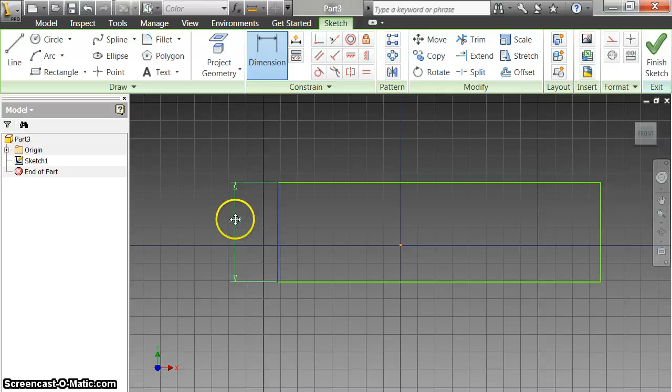So I do a new standard IPT, open up a new standard IPT. I'm going to start by drawing a 2-point rectangle, and I'm just going to come up here because I'm going to have to dimension it. So I click on my dimension. I'm going to do the left side of it, which is 2 squares high.

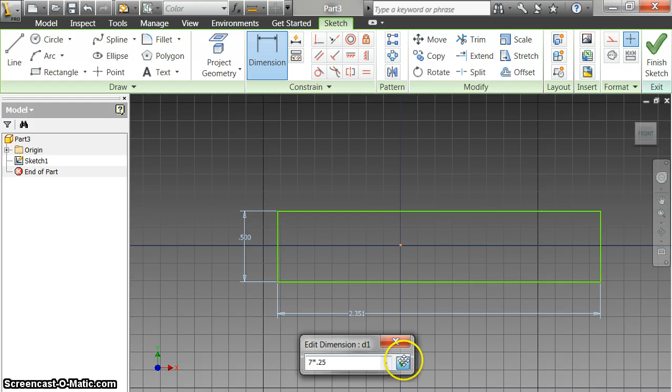So each square is 0.25, so I'm going to make it 0.5, half an inch on this side. And then this one is 2, 4, 6, 7 squares, so that is 7 times 0.25, which is 1.75, or you can do 7 times 0.25, like that. And when I click the check mark, it'll tell me it's 1.75.

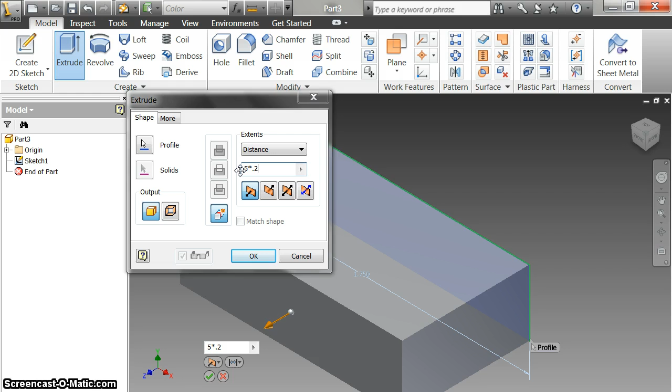I finished my sketch, and now I'm going to extrude it. I'm going to extrude it 1, 2, 3, 4, 5 squares. Again, you can do 5 times 0.25, or you could do 1.25, which is what it would end up being. So this is my base.

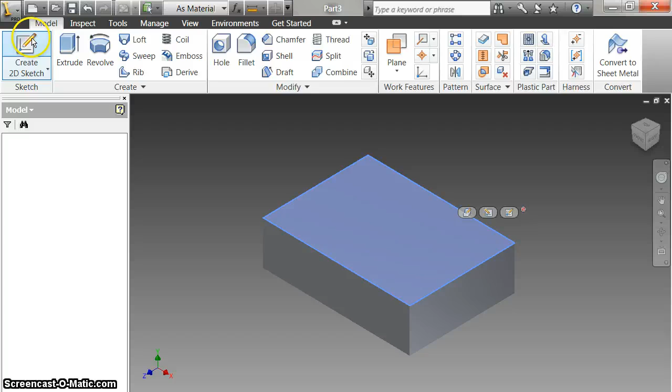This thing right here is, if I go back to my drawing, it's this section, just this bottom section right here. So I come back to Inventor, and now I'm going to create sketch, and just click this top part, and click on the top. So I've got that. I click on the top button, so I'm looking straight at it.

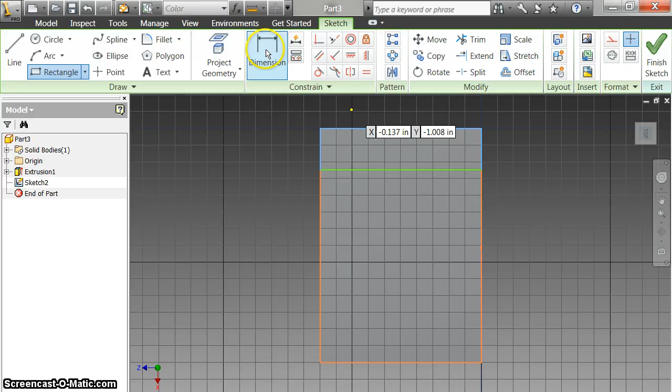I'm going to extrude this top part first. So I'm going to click rectangle. I'm going to go till I see the green dot, click, and come over here somewhere till I snap to that side and click that. Now I dimension the side of it. Best way to know I got it is click this line,

come over here. It is 2 squares, which means that is 0.5. So I'm just going to put in 0.5. I don't need to do 2 times 0.25. So that, I finished my sketch. And so that's what I've got there.

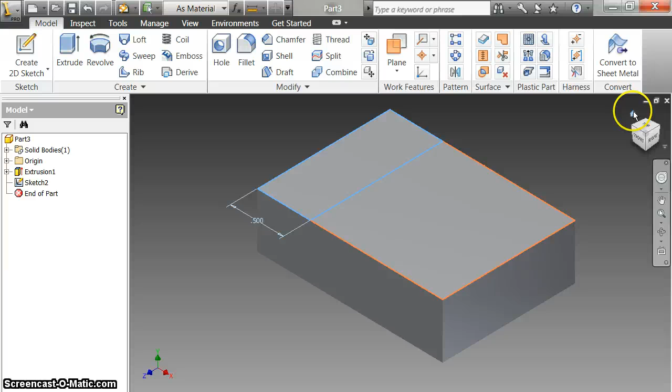So now I'm going to extrude. I click on the top of this, and I'm going to extrude it 1, 2, 3 squares, which I know 3 times 0.25 is 0.75. And there you can see, now you can get an idea that that's what it is.

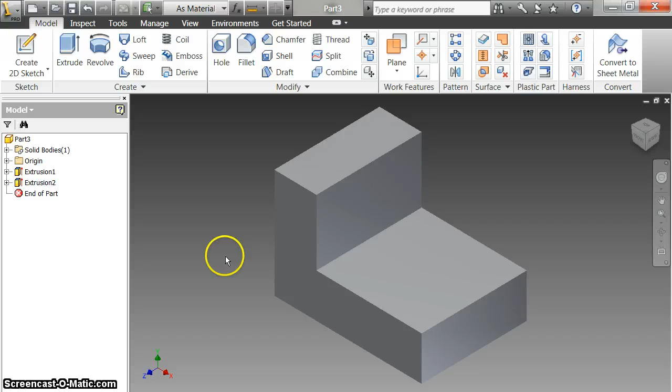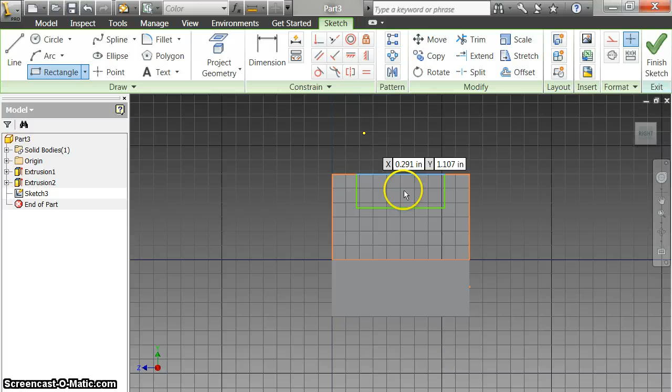So now we just have to cut out this part here and this part here. You can only do them one at a time. So I click on sketch, click on the front of this, click over here so I'm looking straight at it, and now I need to click here somewhere and go over here somewhere. And then I just need to dimension it. I'm going to need several dimensions here.

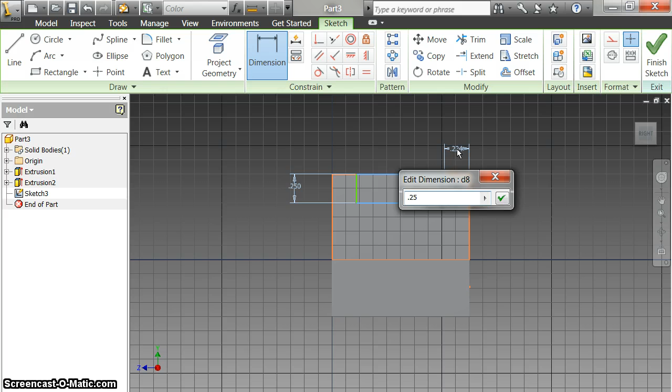I need this one, which is 1 square, so 0.25. I need from here to here is 1 square, 0.25. And then I need this one, is also going to be 0.25. Okay, so now that's all the dimensions I need.

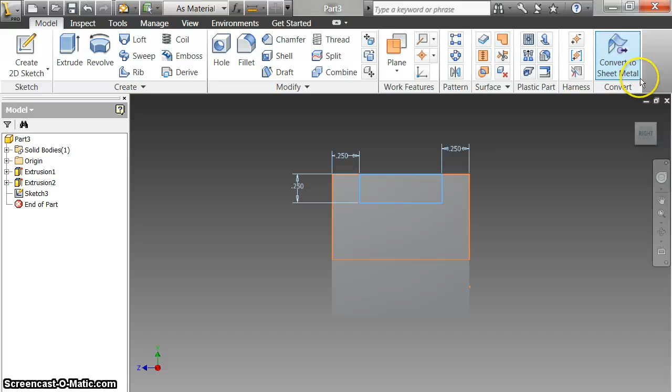I don't need to dimension the width of this, because if this one and this one are dimensioned, this must be. Finish my sketch, turn it so I can see it better. Click extrude, I click this, but now I don't want to extrude, I want to cut. So I click this button here. You can see that it goes in the opposite direction, goes all the way through. I could put a number here, but I don't need to. And I click OK. Now you can see it's really getting close.

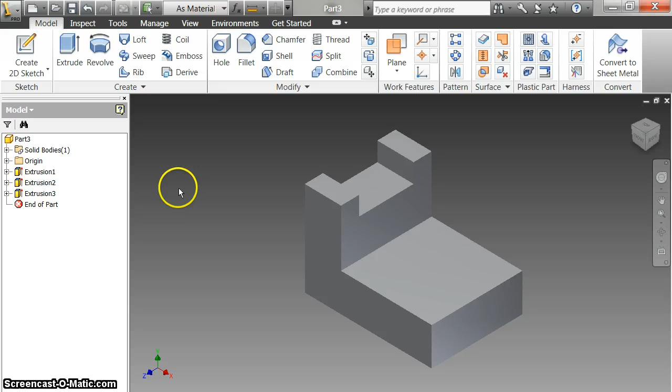One more. Create sketch. Click on the top of this. Rotate so I'm looking straight at it. Again, a rectangle. Click here. Come over here, I don't want to snap that. I'm going to click somewhere like this.

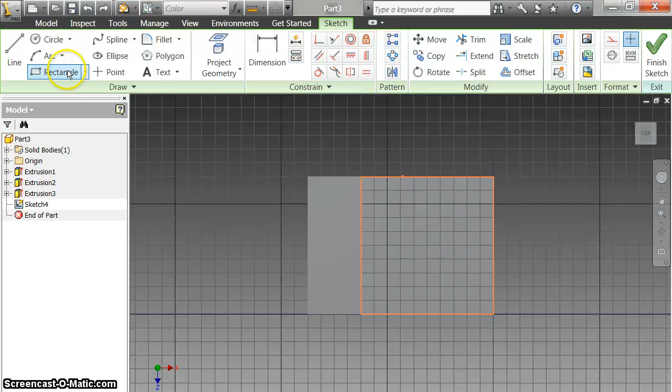And this is where, let me back up and show you this. You can see this little dot here, which is the middle. If I click to that, if I make my rectangle so that it snaps to that like that, I can't change this dimension. If I try to dimension from here to here, and I want to make it 0.5, oh, it does work.

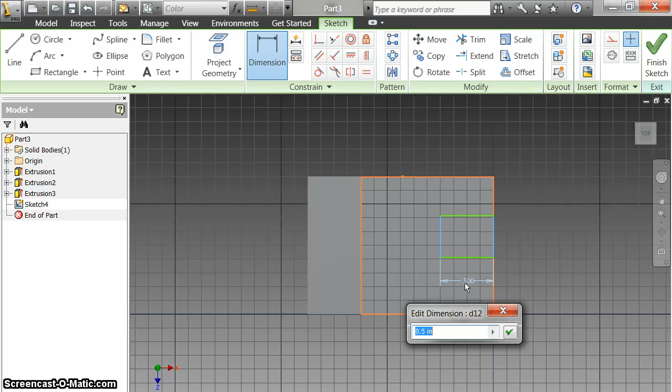Okay, good. Well, let's just change that, because that's going to be 1, 2, 3 squares, 0.75. There's a number of ways I could dimension this rest of it. I'm going to dimension the width of it. Click this line, and it is 1 square, so I'm going to make that 0.25.

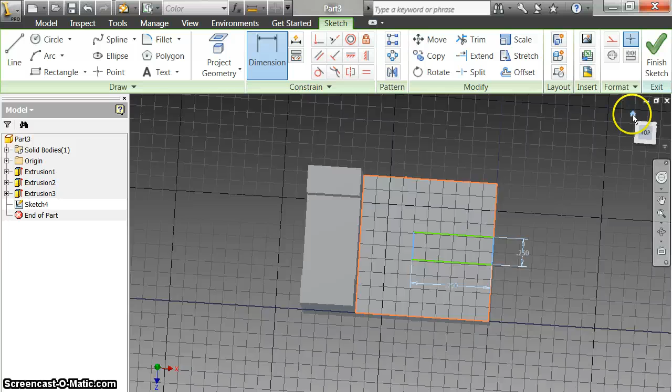Sometimes people would stop here, and if you stop here, I don't know if you can tell, but this is not centered. Watch what happens when I add this one last dimension from here to here and make that 0.5. You'll see that it moves a little bit.

And I could put a dimension here, but it's already going to tell me - I already know it's going to work. In fact, it will come up with a window that says this would over-constrain it. So yeah, it's thinking right now. It's going to tell me, no, I don't need that constraint. So I just cancel it, finish my sketch,

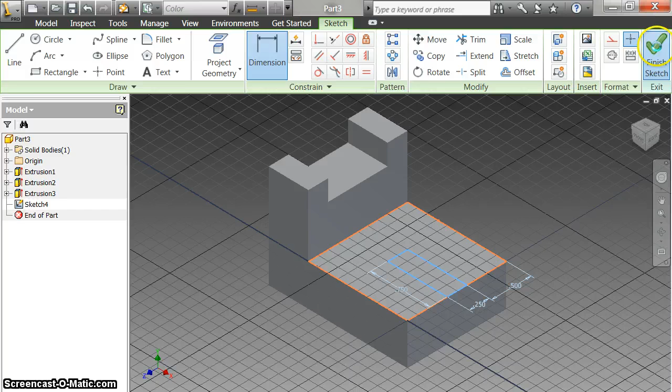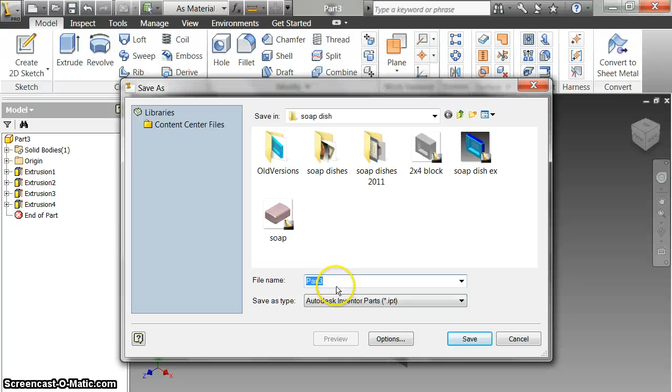Now, since I've got time, I'm going to save this as ISO 1, just to save it there. And I'm going to go through making a dimension orthographic, because I want you to do that too.

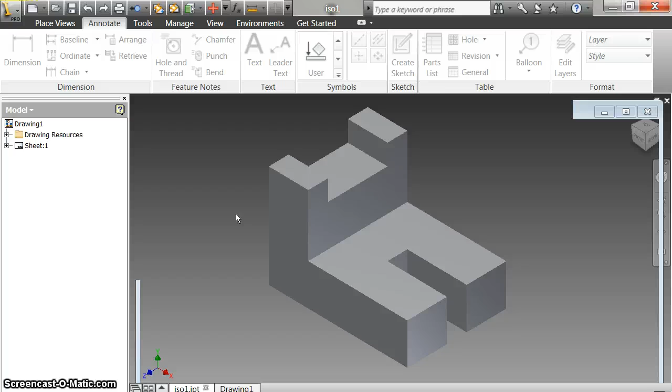So now I come up here to New, and I'm going to do a standard IDW. Double click on that, my window will come up. Looks like that. So now I click on Base. I click on this folder right here, this button. I want my ISO 1.

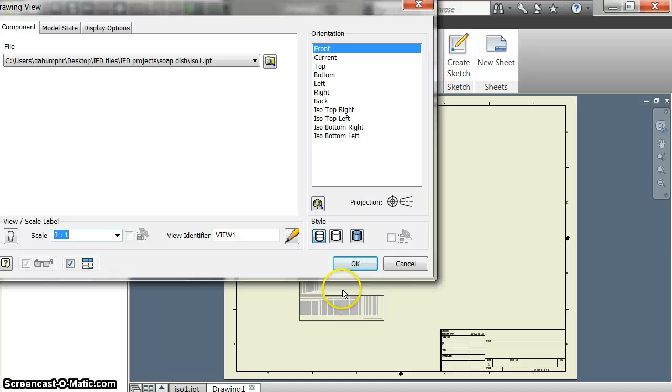Okay, now let's see. Oh, that's really small. So let's change the scale here. I think 3:1 might work for this one. So we'll go 3:1. I bring it right here and I click, and wait for it to work. It'll work its magic.

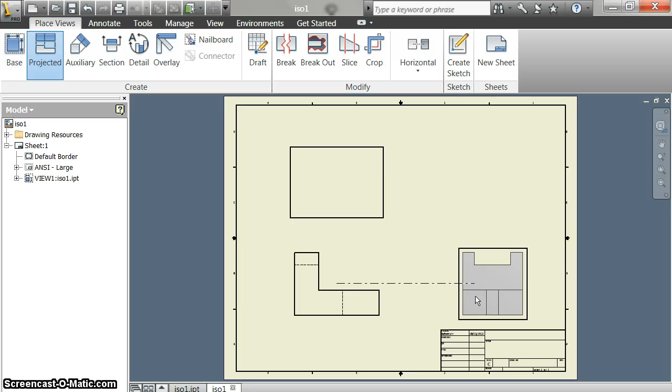Then I come straight up and I click here. That's my top view. I come over here, I click here, that's my right side view. Come up here and I click again. Then I right click, create. Perfect size. So do the 3:1 when you do yours.

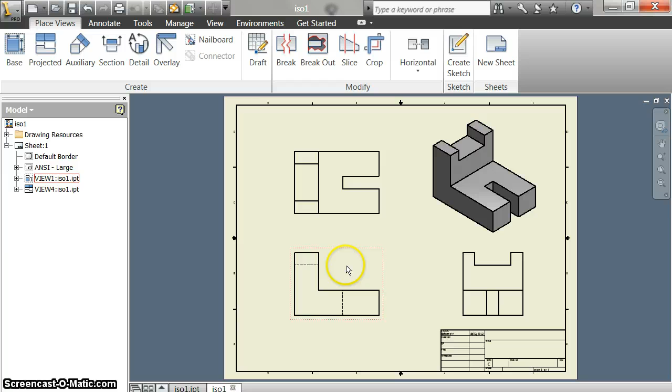I right click inside of this, edit view, check the blue cylinder there to color it in, and then I want to add my dimensions. Let me show you where you should have some dimensions here.

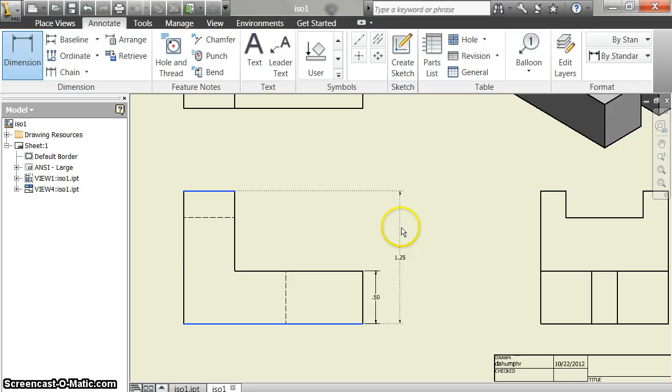I want to have this dimension right here. I'm going to zoom in on that. You'll notice that it goes from dotted to solid. I'm going to do a dotted line here. I need a dimension from here to here. Like that, that gives me that.

I'm going to come up here, and now I need to have a number of dimensions. I'm going to go from here to here. And I'm going to do this - it's what's called chaining dimensions, where they all come off the same line like this, and it looks really nice in drafting.

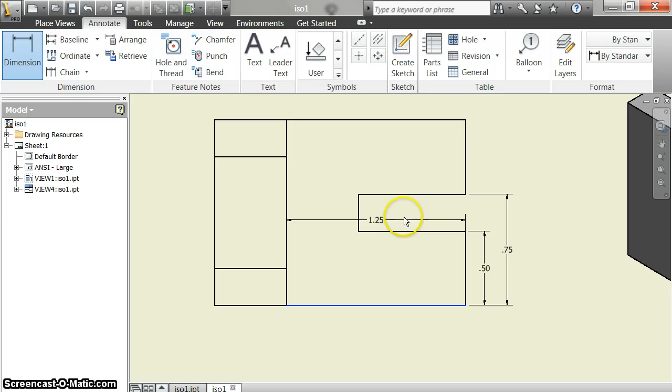A lot of times you'll see this, and we're going to try to do more of that. And so I'm going to do from here to here, and from here to here.

Oops, I'm going to put that out there because I also need from here. I could have done, and you could have done these a couple different ways, but I'm going to leave it like that. Let's see what that looks like.

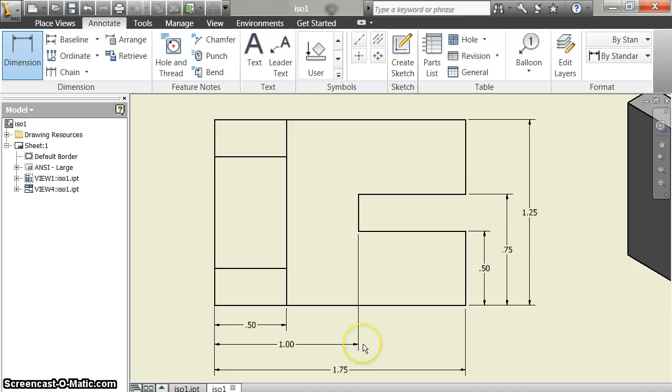Okay, and then I'm going to come over here, I'm going to do some dimensions here. I don't like to dimension off of these hidden lines, I like to dimension off of regular lines. So I'm going to dimension this one right here. And I think that's all the dimensions I need.

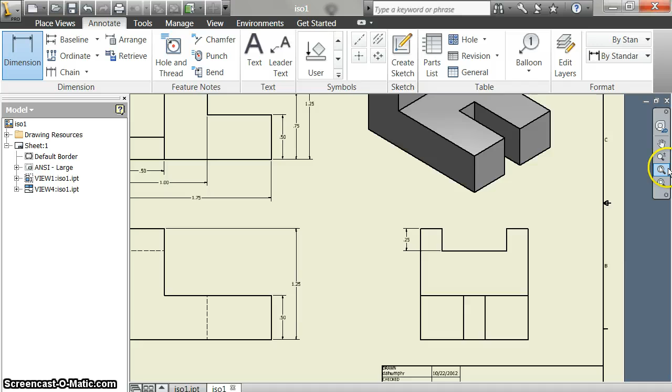I believe that's everything that I need. And so what you've got, so there's my full dimension isometric IDW. This is what you're going to be printing out and turning into me. And it should have the dimensions in the same places, and they should be the same numbers as mine. They should all be multiples of 0.25, because every square is that. So that's how to make that part, and I think we're done.